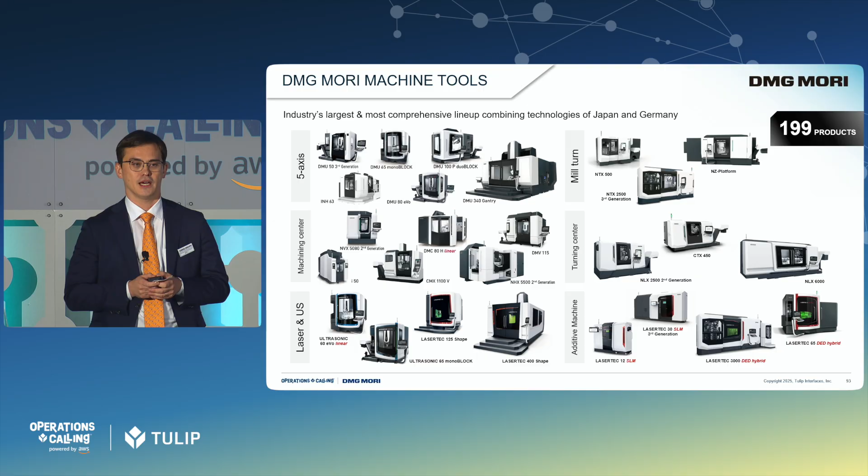These are the machines we produce. I guess everybody has heard of machining centers or lathes, but this technology has developed over the last 50 years, and we now also have metal additive manufacturing, laser cutting machines, ultrasonic cutting machines, a wide variety of machines to process metal and produce precision parts.

These machines of ours are produced in 17 factories in over 7 countries. We also have a production facility in California, Davis, but the main factories are especially in Germany and in Japan. The factory I'm also in charge of for product management is the Iga campus, which is our main factory in Japan. Today I will especially be talking about our Tulip activities in this very large factory.

Another big main point about DMG Mori is that we have a global direct sales network. All our customers worldwide can receive direct support from our sales, service, and engineering teams in 88 countries from 116 locations. So maybe that's a very unique point. Most of our competitors work with dealers or agents, but we try to solve all the problems of our customers ourselves.

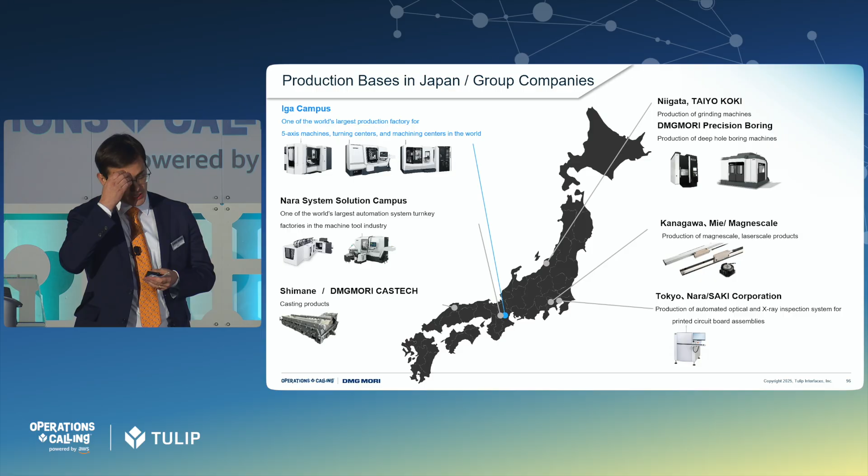Next, I will be speaking especially about our digital transformation activities in the Japanese facilities. I highlighted especially the Iga campus in blue here, where we produce especially horizontal machining centers, turning centers, and mill-turn centers. These are maybe a few of the most representative machines in our group. And in the Iga factory, we do production, also machining parts for these machines.

But I would say the main manufacturing of machine tools is assembly. So you can say that also many of our use cases, which I will introduce, are around and surrounding assembly.

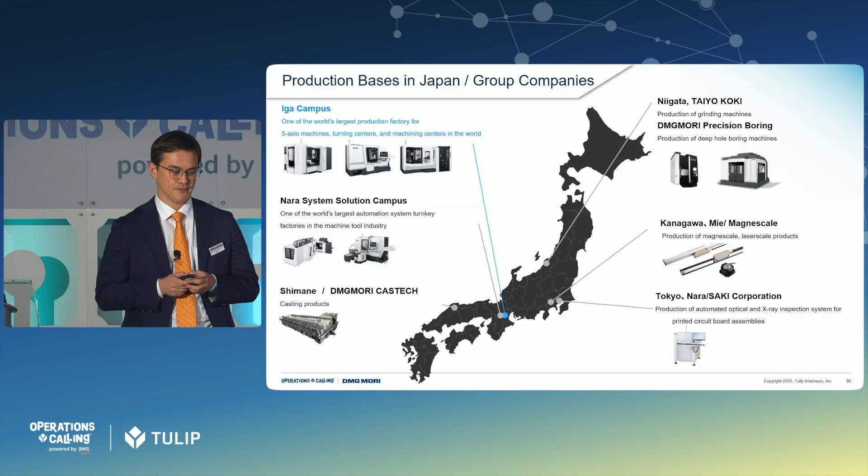Maybe as a last slide introducing DMG Mori - I think Nathan talked about digital transformation, or continuous transformation as he coined it today, in the manufacturing industry. But we at DMG Mori see the digital transformation topic a little bit different from a purely machining or precision manufacturing point of view. We see that this transformation, especially in machining, has to be a little bit more holistic, integrating the mechanical engineering.

So we see the new transformation in this industry as integrating process integration, and then of course robotic automation, and then covering this all, or supporting this all, with the digital transformation. From our point of view, of course, our customers are mainly doing precision machining, so to cover the machining and automation optimization, we need digital tools.

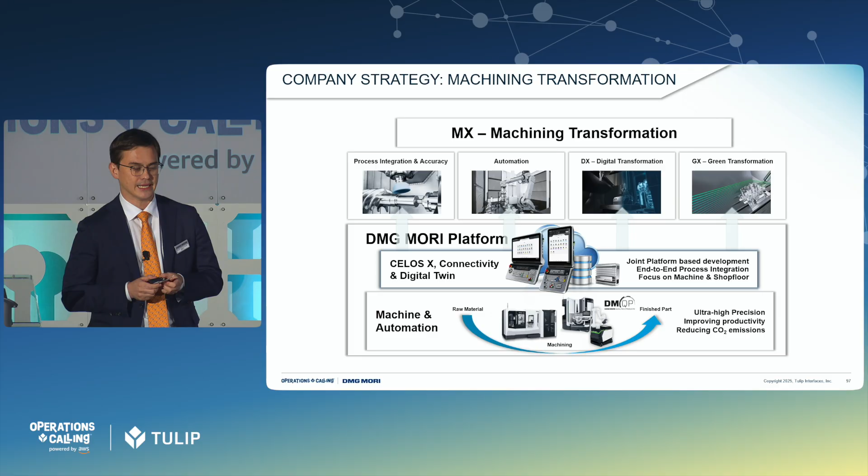And most of the digital solutions we bring to our customers are more or less in support of these optimizations of machining. And Tulip is, of course, one of the tools we use, or we also utilize as a core part of this digital transformation for our machining transformation strategy.

So maybe this is a bit in detail, but I will begin by talking a little bit about our general journey at the IGA factory for digital transformation. What were the core elements of it? Then I have some use cases from different areas in our manufacturing: machining, assembly, quality, information flow, and finally material handling and picking. But I think explaining the core of our digital transformation journey is the most important part of this presentation, where I would like to spend most of the time.

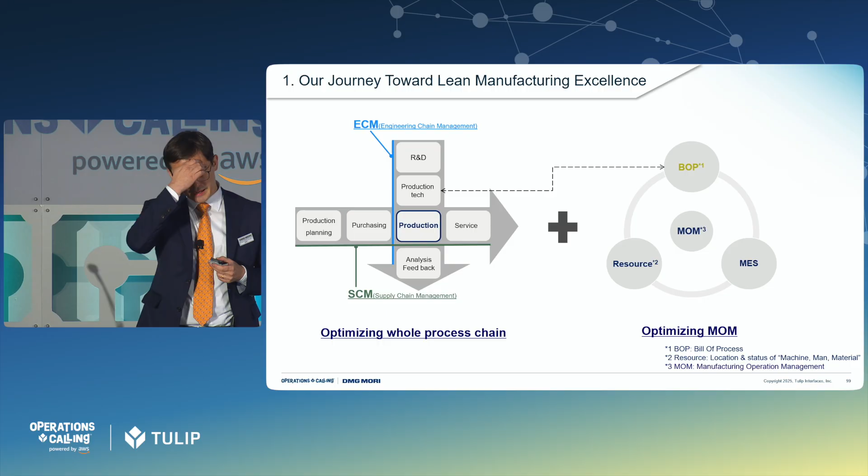So first of all, to give you understanding, as an OEM of machinery, we have two chains of production or manufacturing in our company. One is the engineering chain, here called ECM, engineering chain management, and then we have the supply chain management, SCM.

What this means is that on the one hand, we have the engineers who are developing the machines, coming up with the design, and then considering how these machines should be produced. On the other hand, we have the production engineers who consider what the production process looks like in detail. Because these two different chains have to work in alignment, this is always a huge challenge as an OEM.

And here, Tulip played a very big role in transforming the way we do things at DMG Mori, because we were able to bring in the BOP, the bill of processes. So when the engineering chain management team develops a new product, they create a bill of processes—the processes to produce the product.

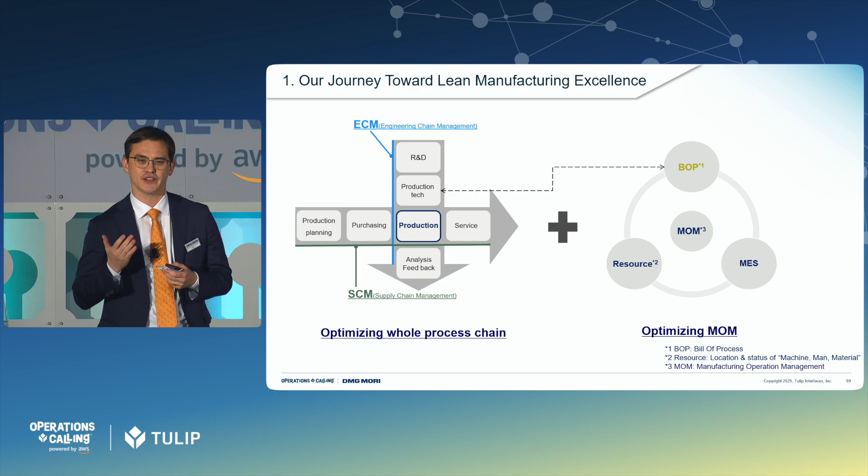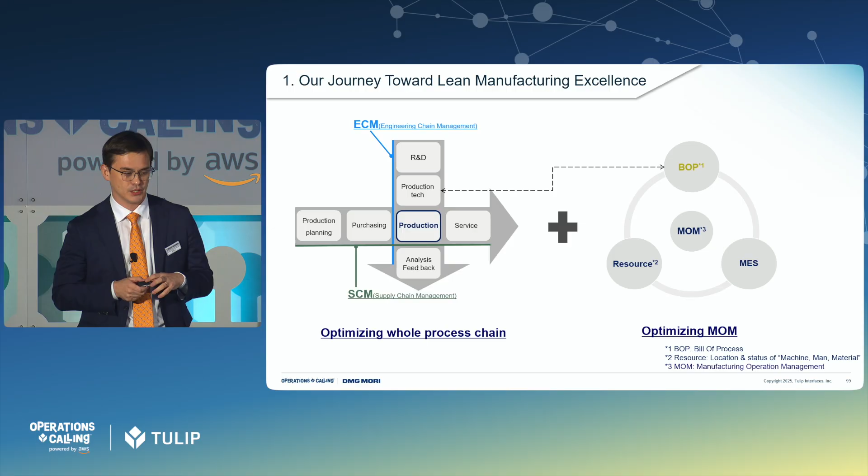Normally, in many manufacturing facilities, the bill of process is just a document that is produced and created in the beginning, but after it's produced once, it's never updated because it's very difficult to update this kind of document. But by bringing the bill of processes into Tulip, we are now able in our manufacturing operation management to fully have a living bill of processes combined with the MES and the resource management, which enables our continuous improvement of the bill of processes, and which made a huge change for us.

So what did it look like when we started the journey with Tulip? Of course, it was not like we only used pen and paper. Already in 2020, we had some digital tools or software tools. But the biggest challenge was that we had siloed systems.

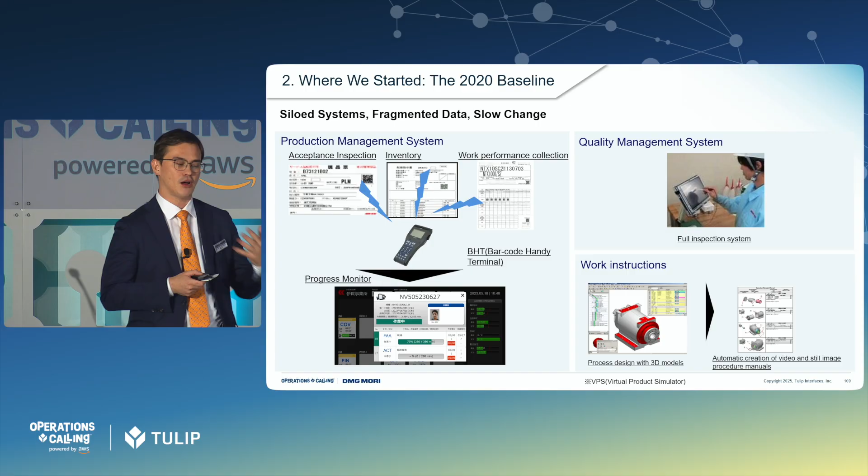We had point solutions surrounding the barcode handy terminal, which was the record keeping of our production engineers. Then we had the quality management system, which was the tool for our quality management. And then we had the work instructions that were created by the machine design engineers. So all these systems were siloed, fragmented, and it was very difficult if our engineering frontline found problems to update anything, because the update might happen in one silo but did not communicate to the other silos.

So now, with the help of Tulip, we created a much more integrated system where every system is talking to each other with Tulip at the core.

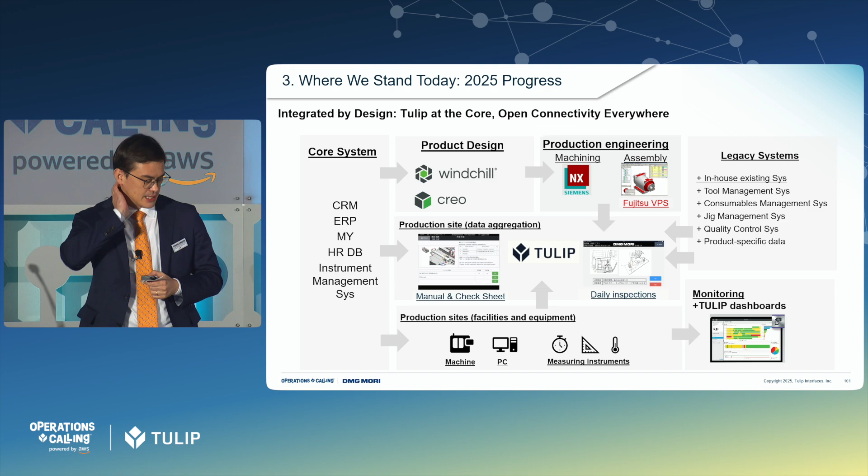Of course, this is still a complex picture, and I guess we still have a very high complexity in our production. But as you can see, on the left side we have the core systems like our ERP systems, our HR management, all kinds of enterprise-level systems. And on the top is where especially our design team works.

So, of course, you have CAD systems for product design. And then you have the production engineering, where our machines are programmed to produce the parts that are needed in the machine tools. But then when it goes to the shop floor, until now, there was almost nothing, because on the shop floor, the people had very rough instructions, and the data about what was happening at the shop floor could not be monitored.

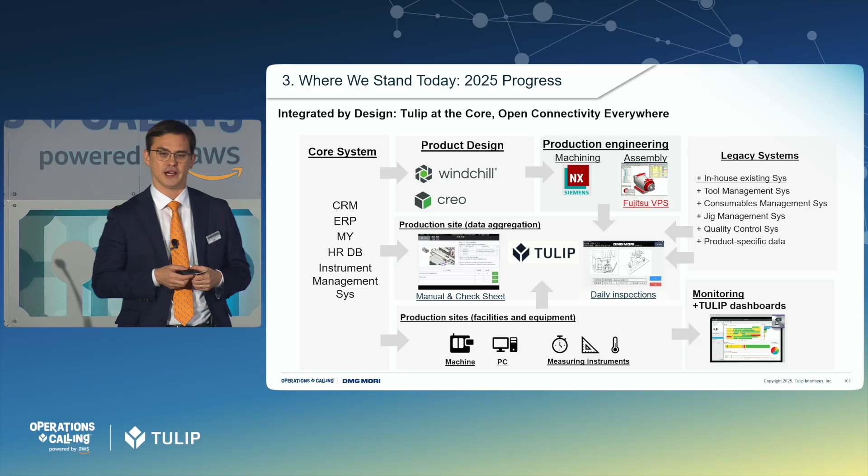But with Tulip at the core now, we are able to continuously create applications that transport the information or the plans that our engineering teams came up with to the operation on the shop floor.

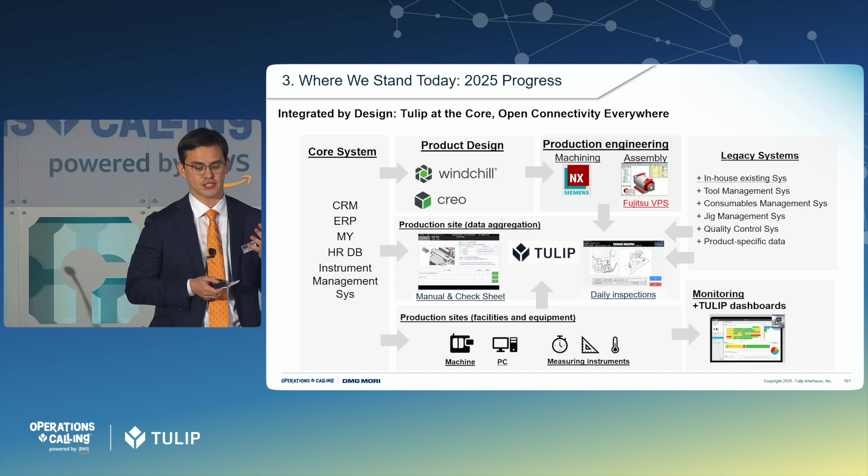We are focused very much on integrating all the tools that our shop floor employees are using to directly communicate into Tulip, to record everything that is necessary to continuously improve our production. On the right side are the points we still have to work on to improve. There are certain legacy systems, like tool management and consumable management on the shop floor. This is more or less a checklist, because we already know with Tulip and maybe some other tools, we are able to move them out of the legacy step by step and turn them into much more platform-oriented systems.

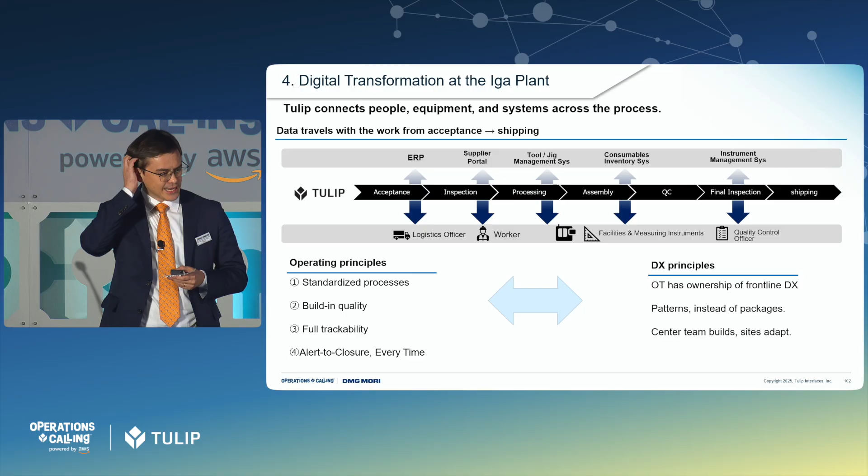So to give you an understanding, this picture on top shows that the whole process chain is now on top. Of course we have the core systems, but now everything is traced on the shop floor, on the front lines with Tulip apps, from the logistics where products from our suppliers come in, to the inspection, then to the assembly, quality management. Everything is traced with Tulip. And for us as a company, it's very important.

So we have certain operating principles. I think they are very typical Japanese manufacturing thinking, or lean manufacturing. All the processes we do should be standardized. We try to not have any unique processes, we try to standardize all the processes. Then all the processes should have built-in quality. That means, of course, there are some post-process quality checks included, but as much as possible we want to integrate the quality into the assembly or manufacturing process.

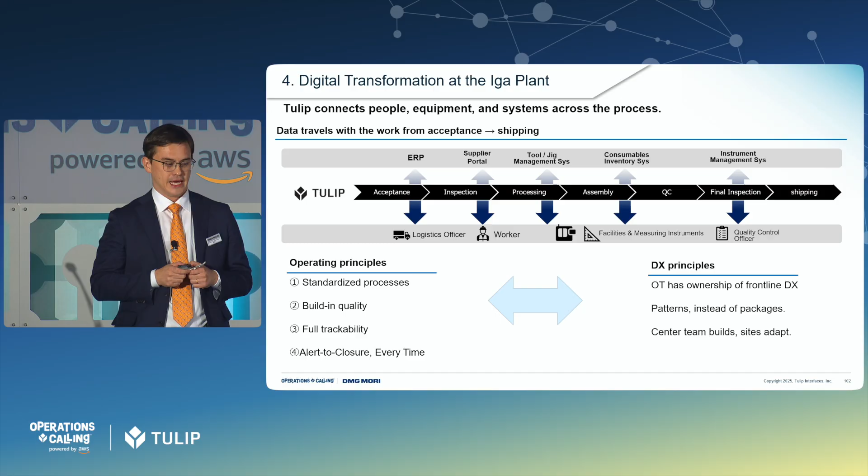Then, of course, we need full traceability or trackability. And I think the last point is very typical, like Toyota-style manufacturing: every time there's an alert or abnormality in the production process, we make sure that every abnormality is closed, and this happens all the time. There are no failures that stay open in the process chain.

On the right side are our new principles that we learned with the rollout of Tulip. In the past, most of the IT systems came from IT vendors, from system integrators, but we have completely democratized the IT in our frontline. That means OT has full ownership of frontline digital transformation.

Then we tried to create patterns. What I mean here with patterns instead of packages is, we are a relatively big company, so we want to roll out the best use cases or best practices to all our factories. But as we know, I think Tulip teaches this very well, no factory is the same. Every factory or every production is unique. This is also the case in our company. Production, even machine tool factories in Germany and Japan, are quite different. So we are not able to roll out the absolute same applications, but they are patternized, and we try to use best practices that are then customized at the front line.

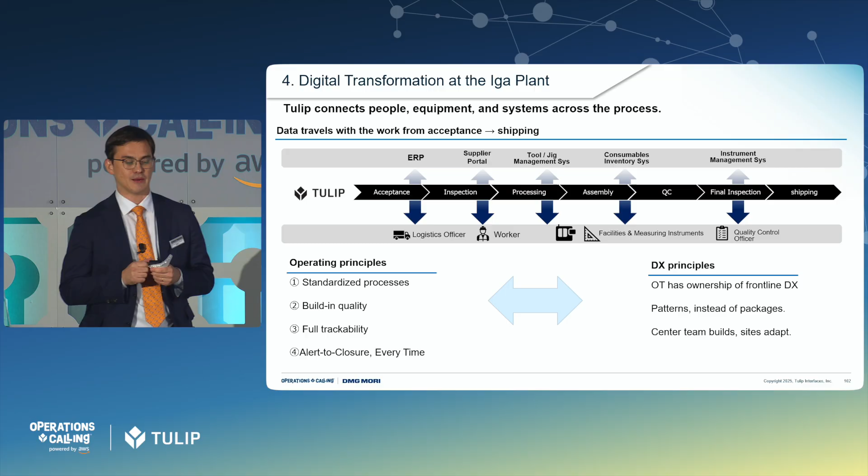Which is summarized in the sentence: the center team builds the apps, and the sites then adapt how they are used.

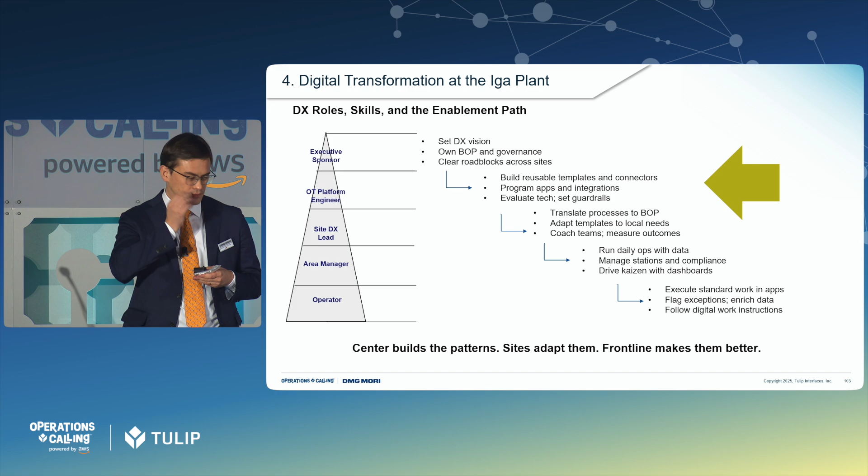Another huge learning for us was that a digital transformation process in a large organization needs organizational structure. Same as we have organizational structures for engineering, production planning, or whatever, the digital transformation also needs an organizational structure. Especially with composable MES systems like Tulip, we need a strategy. We saw in the beginning, and I think I made the same experience with customers, that often people believe that with composable MES you can start purely from bottom up. But actually this is not the very best way to move forward with this.

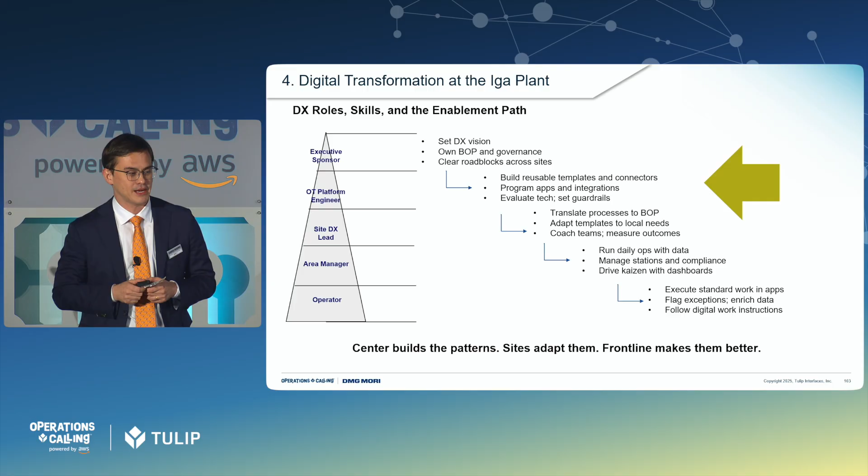I think it's a hybrid process. On the one hand you have bottom up, on the frontline apps are built or optimized, but you need a strategy from the top. So every digital transformation project needs an executive sponsor.

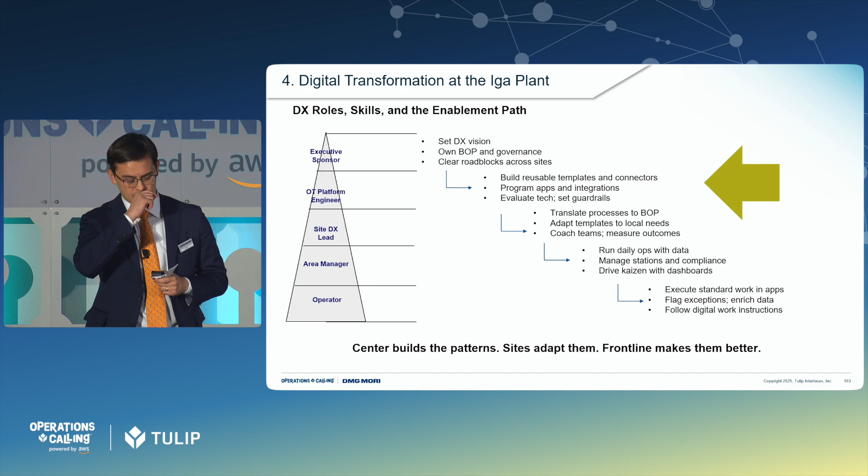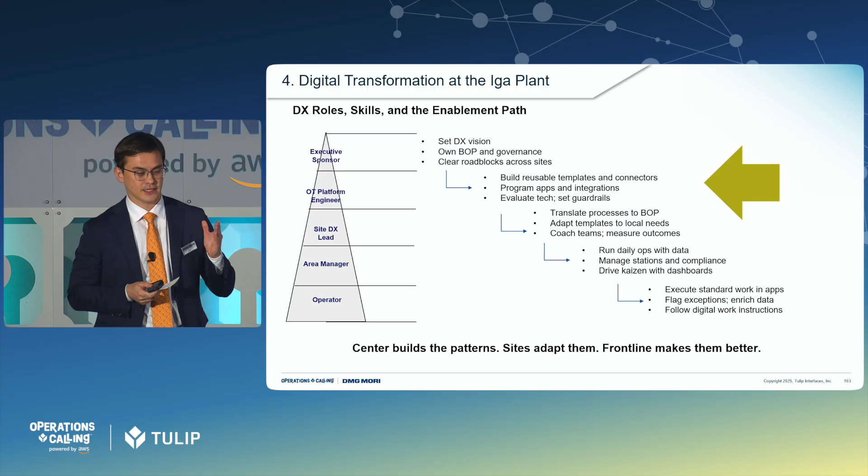That's why I made this yellow arrow here. I think the most important department or team to create when you roll out composable MES or any no-code application in a manufacturing environment or across an enterprise is a certain steering team. That's what we built in Iga, and I think it's also the secret behind our big success with Tulip, because this team has a very deep understanding of the applications or use cases, and they are able to continuously roll out or solve problems and roll out the best practices, not only inside our factory but also to our sister factories or to our suppliers.

So we started in 2021 with a dojo, because of course, if you want to democratize IT, you need to teach the people in the front line. So we created a dojo where our Center of Excellence taught the different teams about Tulip, how to build apps. Then the teams immediately after this phase started to build apps, and we had onboarding at scale across all different types of departments.

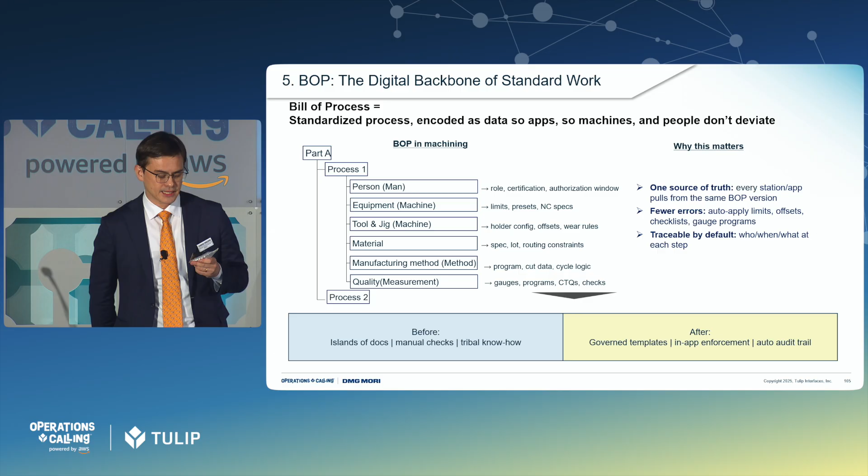So just as a final slide about our overall experience: one point that we thought is very important, especially in a larger OEM environment, is to have very good BOP management—the management of the bill of processes.

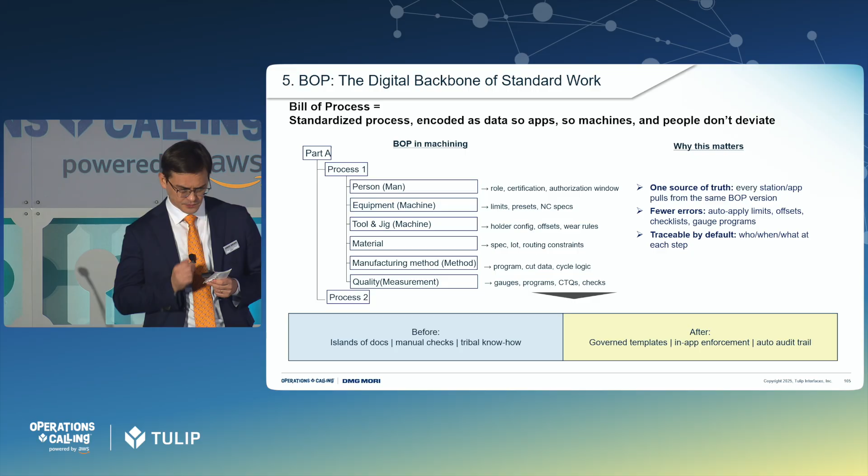The bill of processes in the past, before we used Tulip, was always a document that came out of product design, which described how a product should be produced in a very rough way. Then the production management or the shop floor had to read between the lines and adjust it, but normally this information was never fed back to the teams that designed the products.

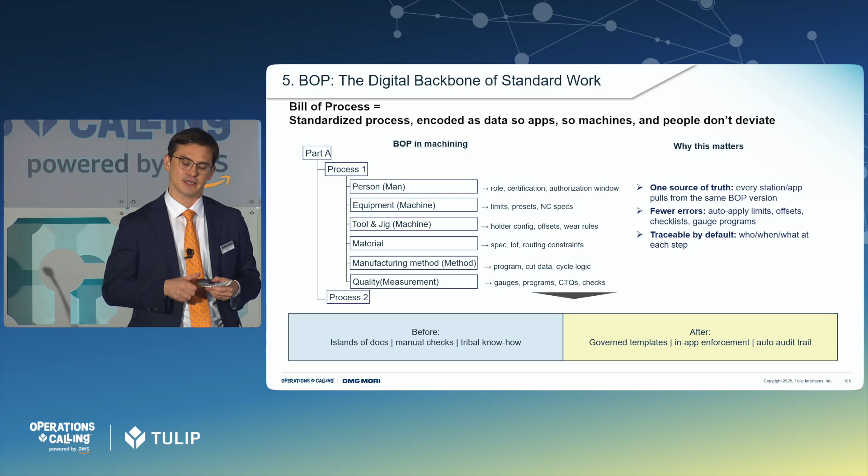With the rollout of Tulip, the BOP has become really one source of truth, because the BOP is now shared—it's like a work in progress. So when a new product enters production, we are now able to update the BOP, and we have much more standardized processes because there's no interpretation between the lines.

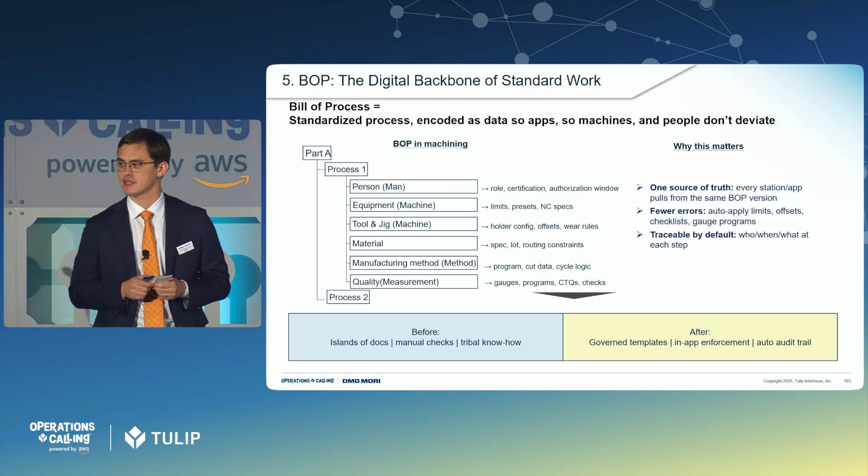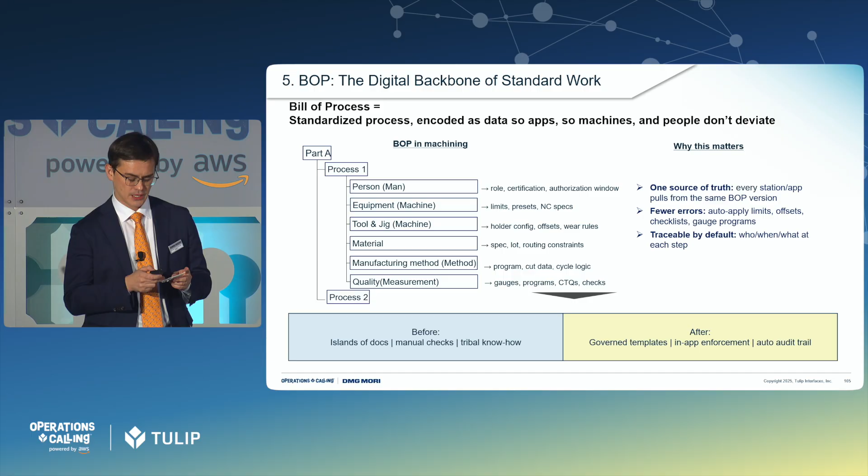What I can recommend, which is what I'm already doing for a lot of our customers, is that if you have a complicated product lineup, if you're designing products that are complex, having a BOP will help you roll out this kind of environment. So I will introduce some of the use cases.

I have to warn you, some of them are quite complex, so maybe not that easy to understand. I will try to make it easy, but I didn't want to take out too much complexity from these use cases, because in the end we are speaking about very complex issues. So I hope you can follow.

The first one is actually the most complex thing we did in the last 1.5 years, which is creating a Tulip-centered tool management in our company. In the past, tool management—cutting tools and machine tools—was a very important part of the machining process. Cutting tools are very difficult to manage because on the one hand, when you plan a production, you have to consider which cutting tools to use, and once they are under usage, you have to track how much wear has happened already.

You have to track the cost of the cutting tools. You have to track the stock of the cutting tools. You have to get everything just in time. And, of course, they are also quite small in a big factory environment, so knowing where they are and getting them to the place where they're needed at the time is very difficult.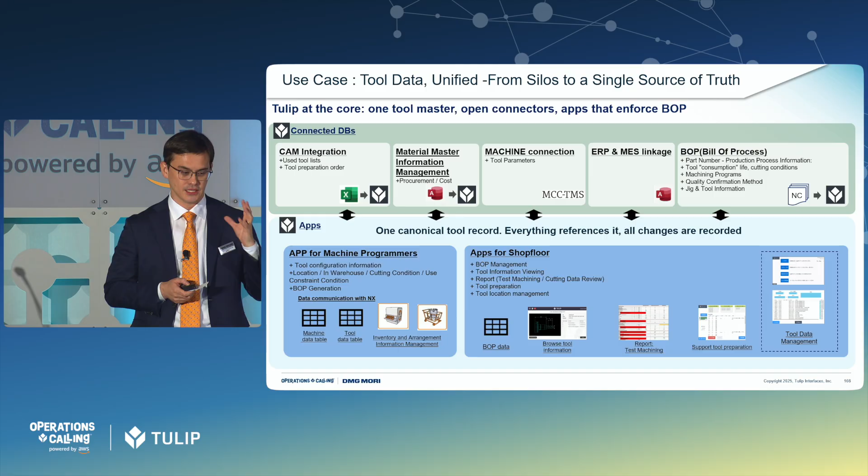Then we have the material master information management, which is necessary for our procurement. Then we have to communicate this information to the machines, because we don't want to manually input this into the machines. So we have to connect this to our machine tool management system.

Then we have, of course, to keep everything aligned with the ERP and MES. And then finally, we also have to align this with the bill of processes, because every time an engineer designs a part, he has to create a bill of process that also includes all the cutting tools, and how the cutting tools will wear off after producing 1 part, 2 parts, 3 parts.

This is very complex. And by integrating this all into Tulip, we were on the one hand able to create an application for the people who program the machines, so they know all the information about the cutting tools. On the other hand, for the people on the shop floor, getting the information they need to do the operation.

And how this actually looks, this is like the 3 steps, more or less. So on the very left, you see the people we are now using in-house. We are using Siemens NX as a CAD/CAM.

So the people who are doing the CAD/CAM can find all the tool data through Tulip immediately. They don't have to hunt down the tools, the tool information. So the common operations for tool management were reduced dramatically, on average, from 10 minutes to 30 seconds for a certain part.

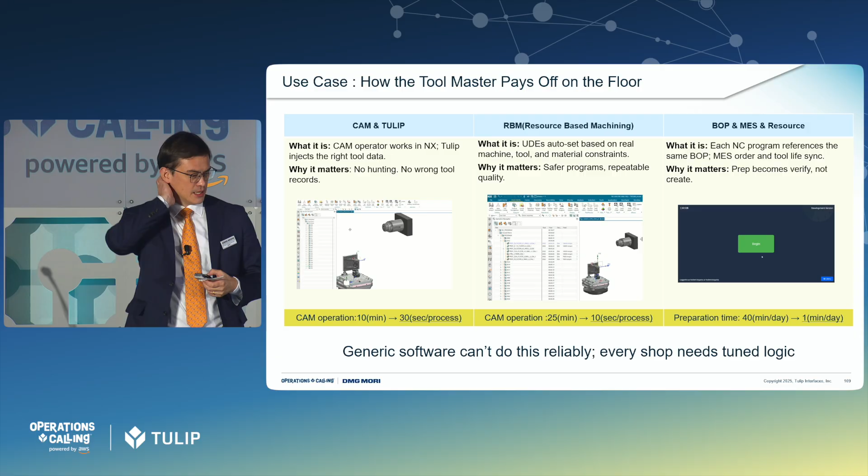And then the resource on the other hand - UDE is a term from CAD/CAM. So the information that is necessary to update the CAD/CAM information when a tool is already used, or is a brand new tool, is a little bit different. So this updating also now happens through Tulip.

So if a tool is already used on one machine and then brought to a different machine, this information can be directly linked through Tulip to the second, different machine. And then, of course, all this information has to be updated constantly in the bill of processes, and this can all be done through Tulip.

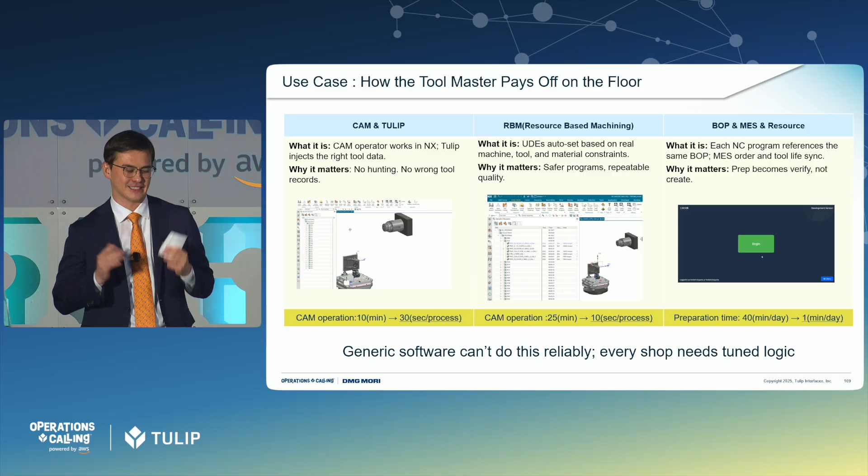So why did we do this with Tulip? I guess you can imagine there are a lot of different software solutions for tool management. But as a company of our size, we actually compared a lot of specific tool management softwares, but we realized that none of those actually just fit our needs.

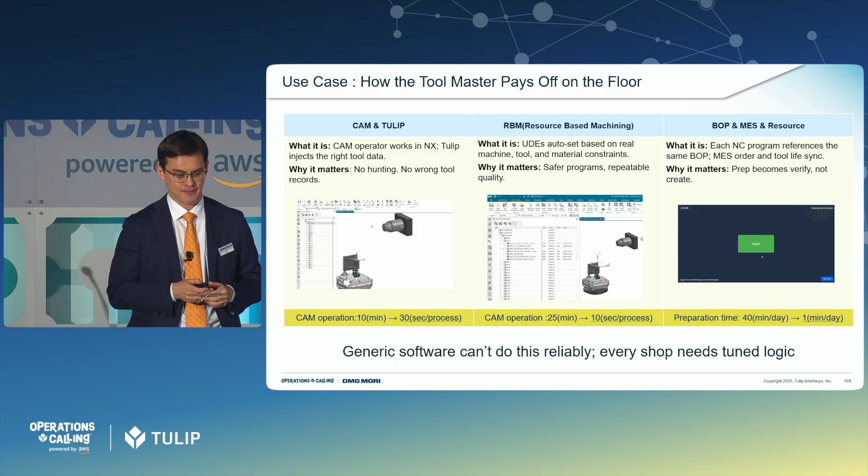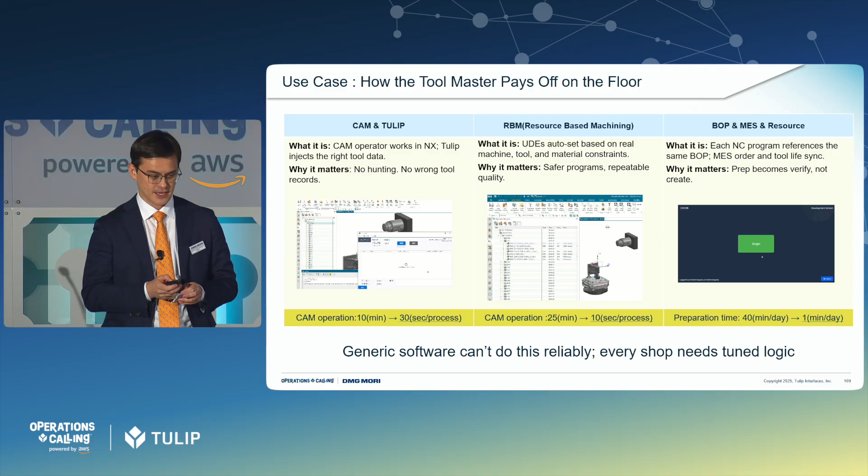So our engineering team decided to build the tool management by ourselves, which was possible, of course, with the no-code platform. So, of course, the lesson learned here is that sometimes it's better to use a specific tool, but if you don't find the software that exactly fits your needs, then it's always maybe a good idea to build it yourself. And then, of course, no-code is the best solution, I would say.

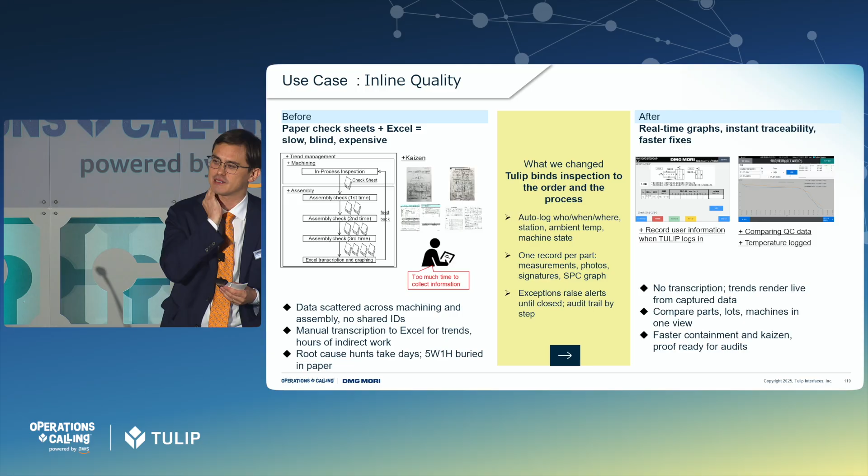Another topic here is inline quality. So in the past, our quality management was a lot of pen and paper. I guess this is not a very unique example - I think this can be seen at a lot of manufacturing facilities. A lot of quality information is collected with pen and paper, and we transferred all of this into Tulip.

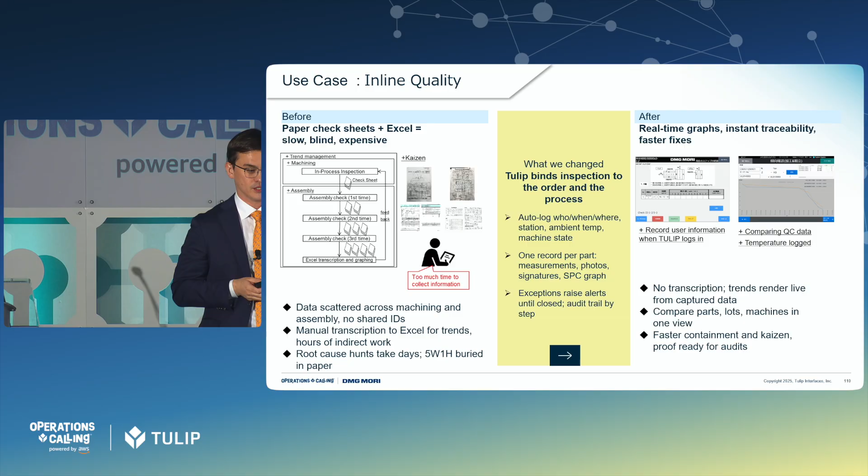This enables us to see quality deviations in real time, because all this goes into graphs that are automatically created. So we were able to completely get rid of paper in our quality department. We even made it a rule that there's no paper anymore, which we were then able to achieve.

The next use case is assembly, which I'll spend a bit more time on, because as I said in the beginning, assembly is the most important production process in machine tools.

One important point was the ability to bring together engineering chain management and supply chain management. We used our system for BOP, the bill of process management, so that Tulip can directly read out of that system. When a designer designs the bill of processes, it's not only in his design software, but directly broken down into a Tulip step-by-step manual for operations. This was a big game changer, because from that point on, engineering chain management and supply chain management were completely aligned. This was a huge change.

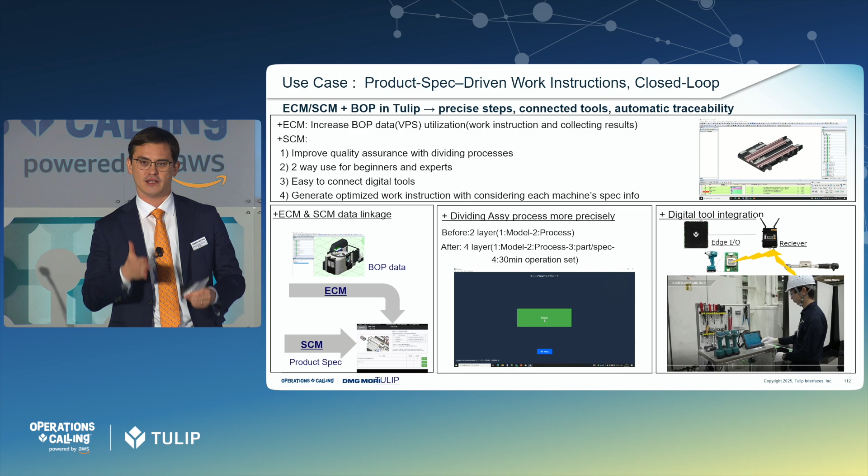We use Fujitsu's VPS software, but I guess this could be done with any type of assembly simulation software. We recommend this to our customers all the time, to bring these digitally in alignment, because as we see in many companies, if there's a divide between these two systems, you will never get full alignment between these two departments.

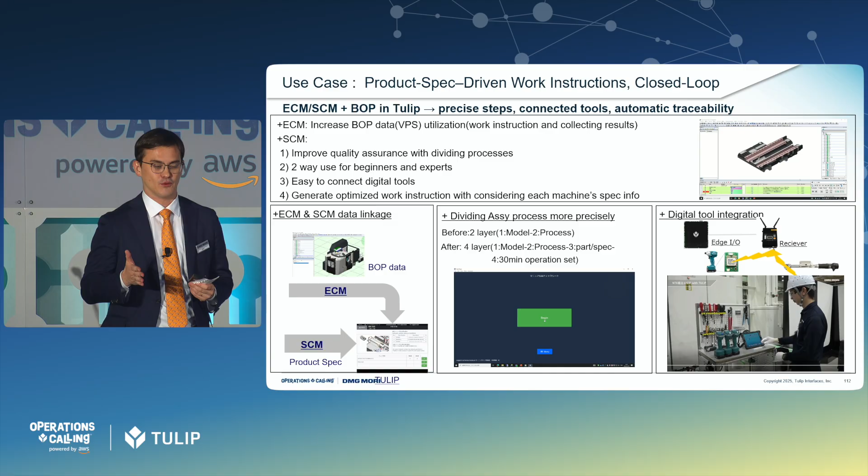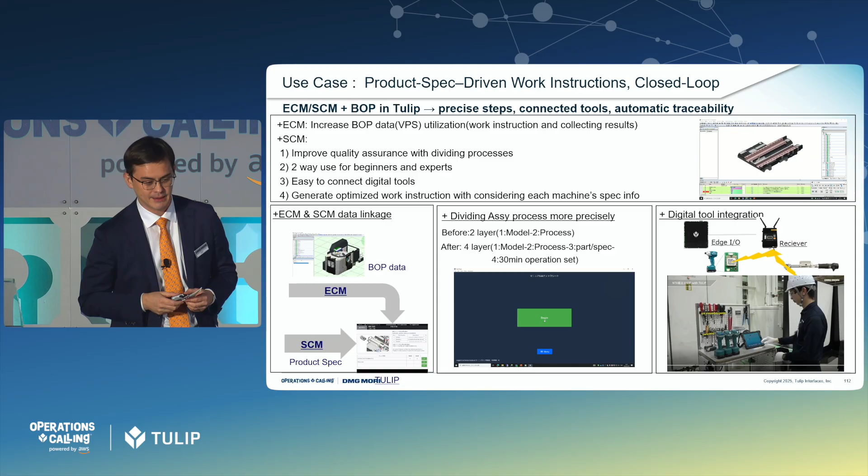Since the bill of processes was then in Tulip, a work instruction software that can be updated all the time, we were able to go much more in depth, creating really small step instructions for our assembly employees. As I understood, we measured reducing products that had quality problems after installation by 75%. This was a huge impact for us, maybe the biggest impact for IGA from rolling out Tulip.

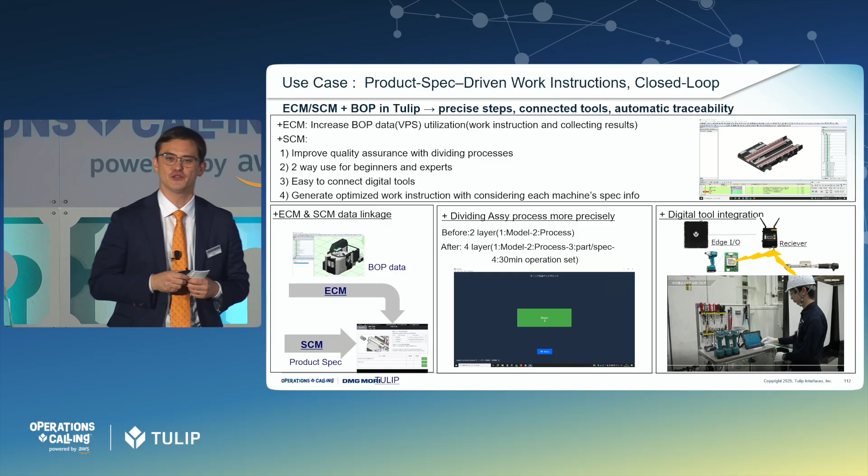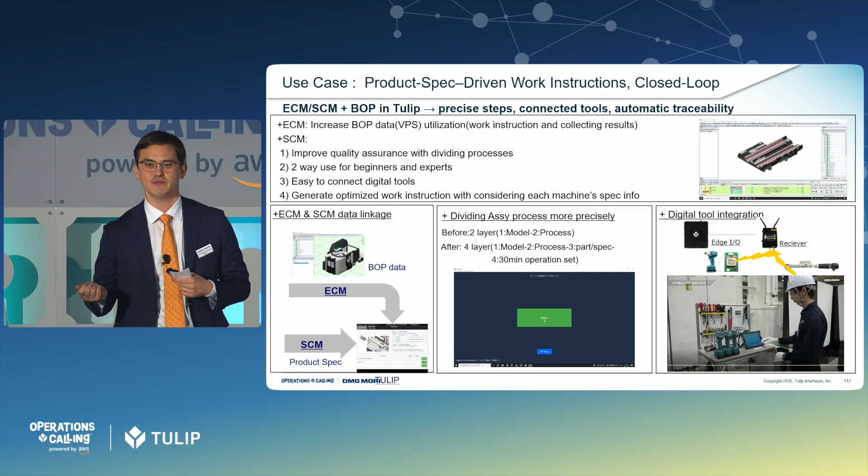A lot of customers, when they come to our factory, the first thing they see is that all our hand tools are IoT-enabled. As I said before, we removed pen and paper, but now we also removed manual input. By IoT-enabling all the tools we use for assembly, for example, the torque measured by the torque wrench is directly written into the system, so there's no mistake anymore by manual input.

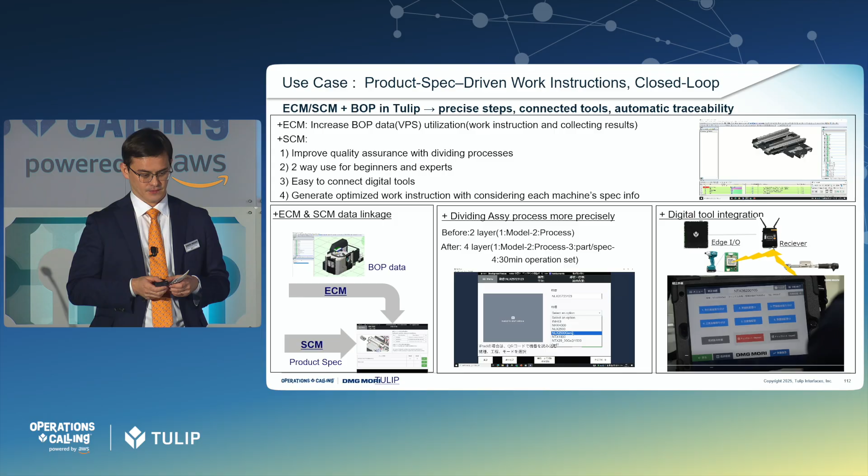As you can see here, they just activate a certain process and then use the IoT-enabled tooling, so there's actually no input needed, just selecting the process.

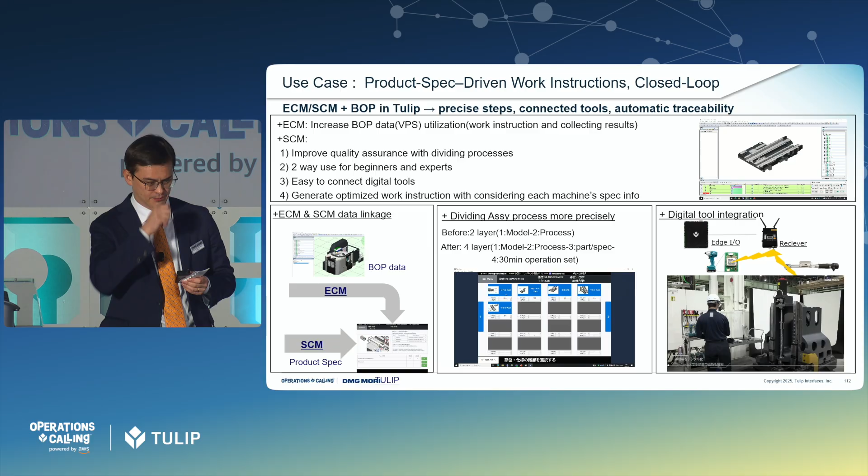To go a bit more into detail on how more specific, detailed work instructions benefited our department or were enabled in the first place: before, we had the model and then the BOP, which was only a very high-level instruction. So the people on the shop floor had to come up with the idea of how to actually assemble the products themselves.

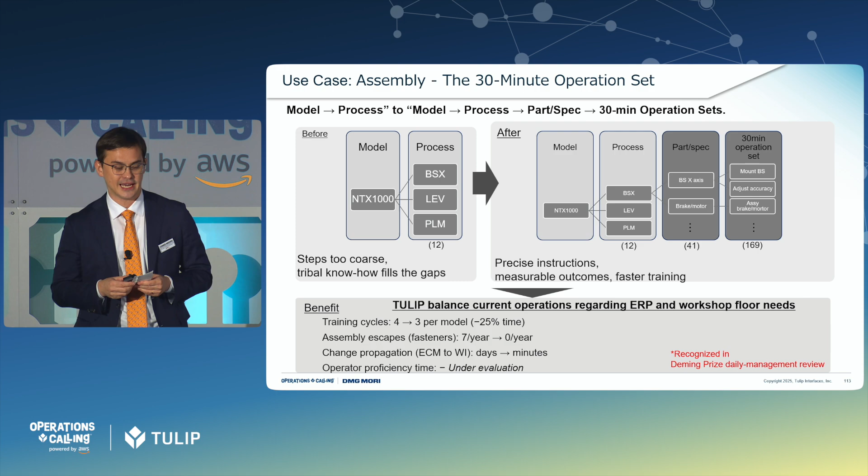By combining this with Tulip, as you can see on the after side of this slide, we are now able to see the light gray areas, which are in the assembly simulation software, and the darker gray area, which is in Tulip.

By rolling this out on Tulip, our production management was able to create a new rule in the company that all work instructions have to be a maximum of 30 minutes, so there are 30-minute operation sets. Having these 30-minute operation sets makes continuous improvement much easier, because there's a certain time everybody's trying to protect or stay aligned with, and you can much more easily improve these 30-minute sets continuously.

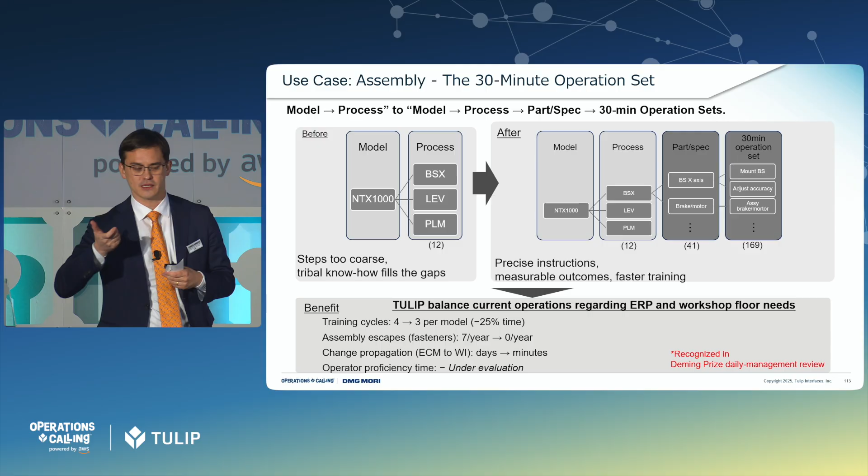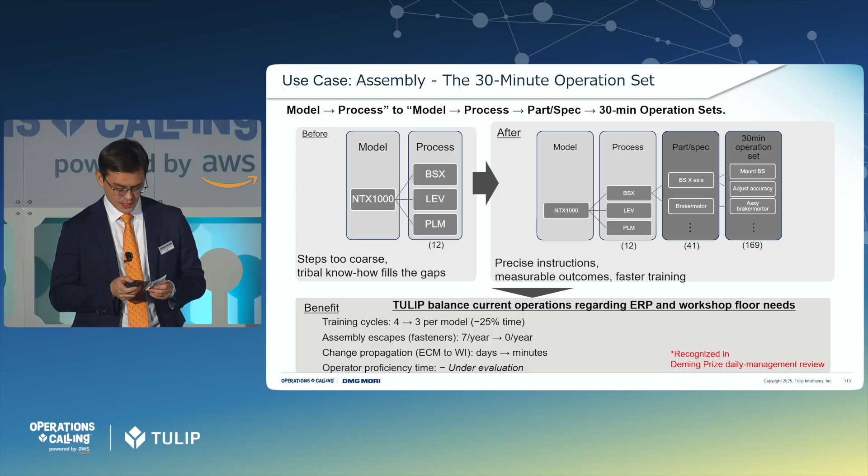As you can see here, this has brought a lot of different benefits to our factory and especially to our products, which is really, really highly beneficial.

Then there's one more use case I want to highlight, using a very new technology, and I think a very important partner for Tulip, which we were also introduced to by Tulip.

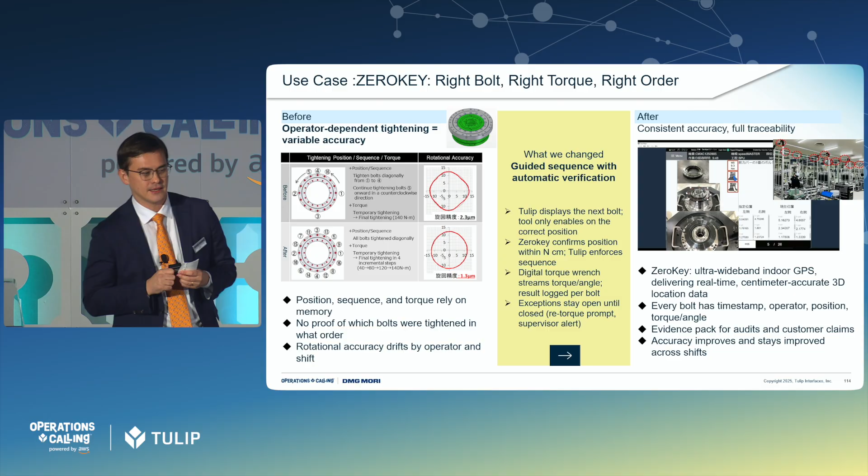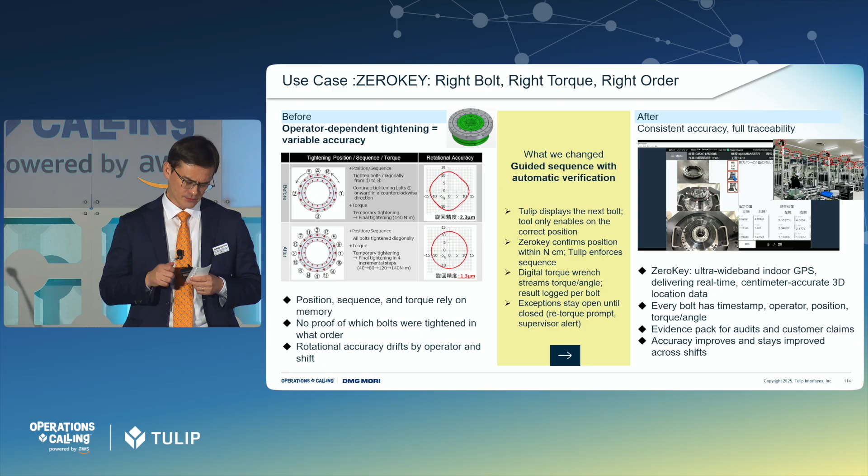This is ZeroKey. As you can see, on a machine tool, this is a high precision machine. There are a lot of bolts and screws that have to have a very specific torque, how they have to be fixed, and the torque used on these bolts has a high impact on the accuracy of our machines.

In the past, often it was the case that the torque and how the bolts were screwed in were very dependent on who was doing it. So it was very human dependent. And of course, if you would use robots, you could also improve this. But the point here is we still work with the same assembly employees.

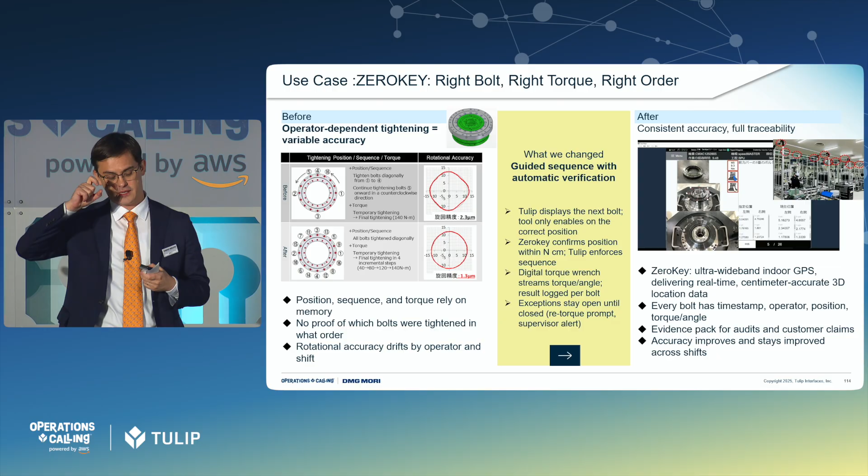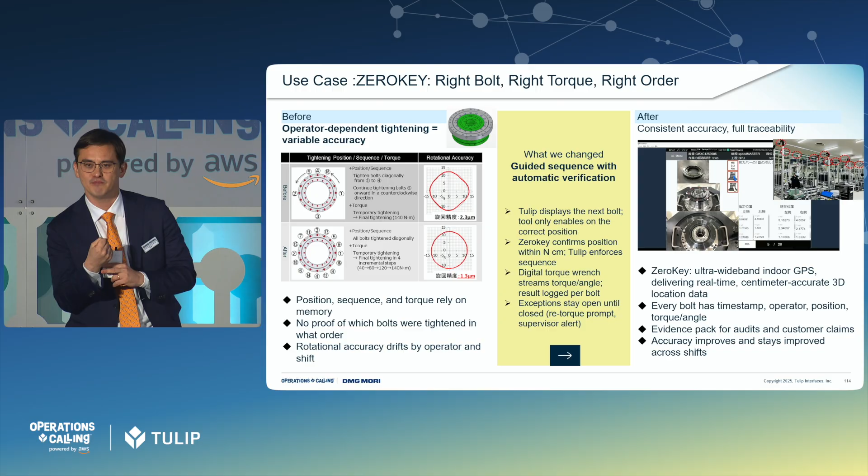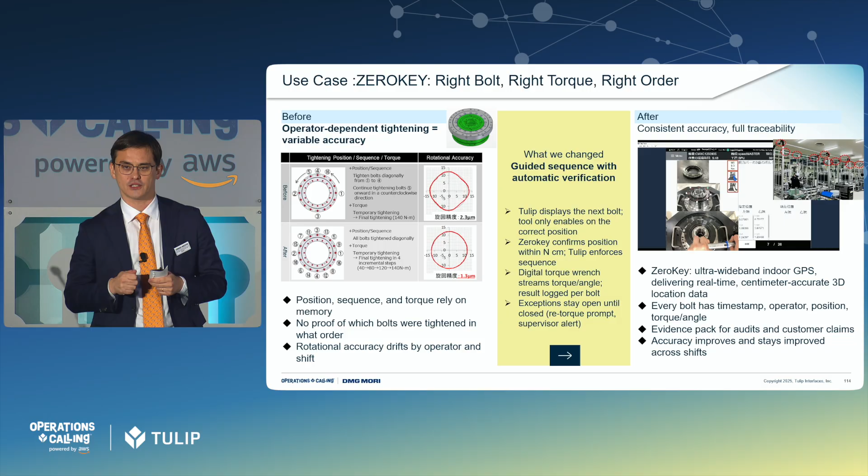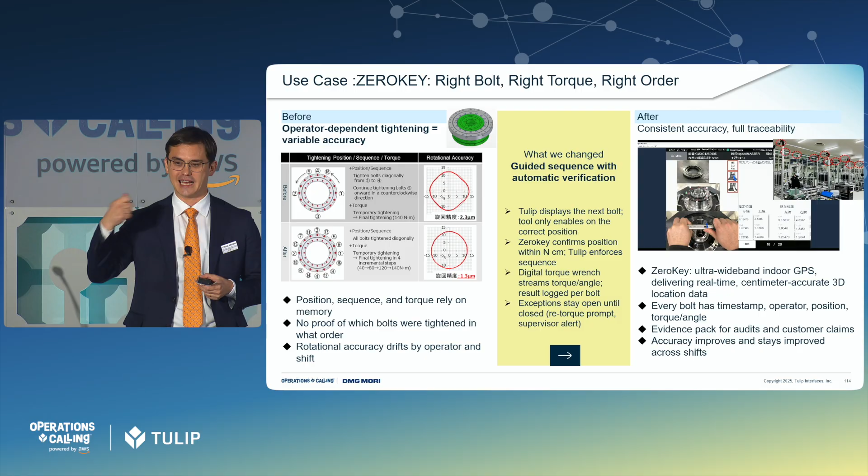But now we are using ultra-wideband indoor GPS that can track, in centimeter accuracy, the 3D location of a GPS tracker. So what we do is we put GPS handbands on our assembly workers, and when they screw, as you can see here, they have an IoT-enabled torque wrench, and when they close the torque, of course the torque is recorded. But not only that, the location that is currently closed is actually recognized by the ZeroKey function, so that the operator has to do it in the right order. He does not have to tell the system which screw he's currently working on, but the system automatically knows where he's working.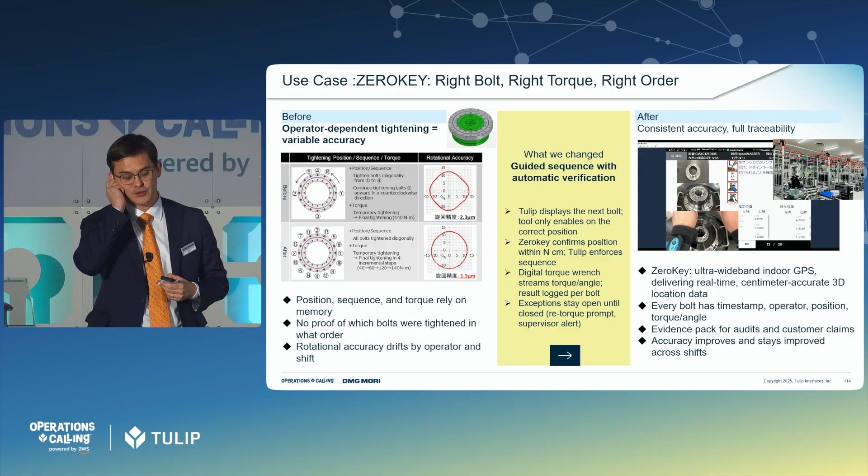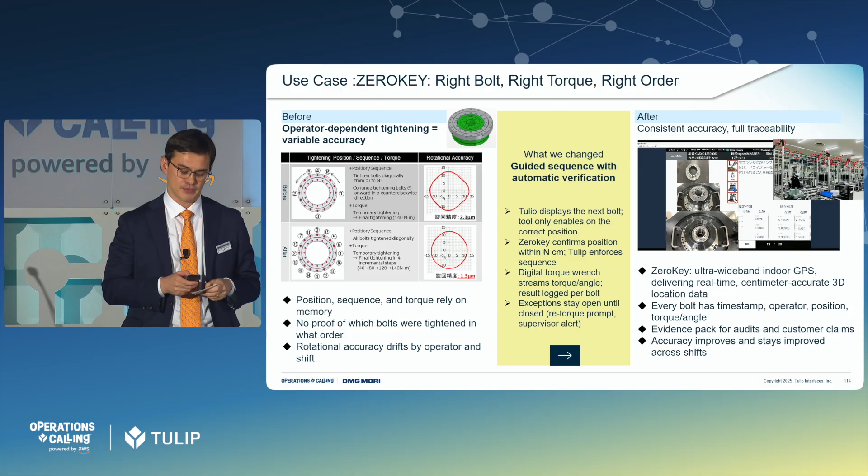To do this, we had to install these GPS readers in the factory, on a factory roof or on the ceiling. But by doing this, we can also trace immediately exactly where the tools are used and on which bolts. So this is also a huge game changer for improving quality.

And the next topic or use case will be inspection and quality. I think this explanation will be a little bit more generic. Of course, in the past, quality inspections were mainly done by pen and paper. And here we used our experience with IoT. DMG Mori has been doing IoT, I think, as a front runner in our industry.

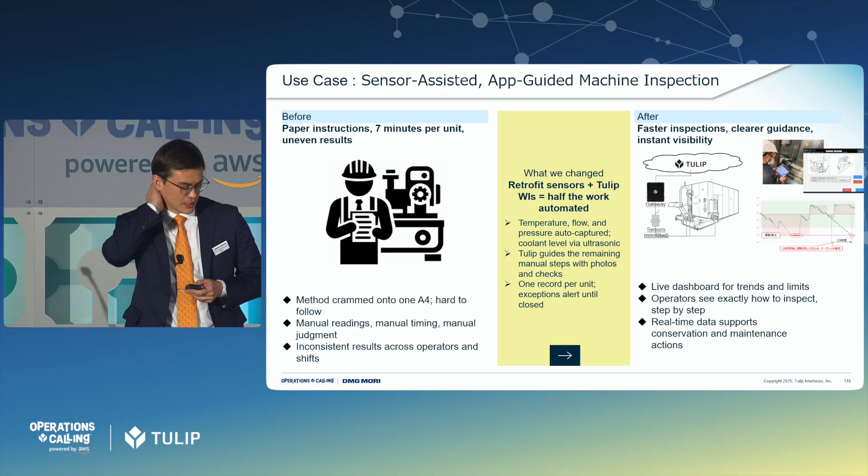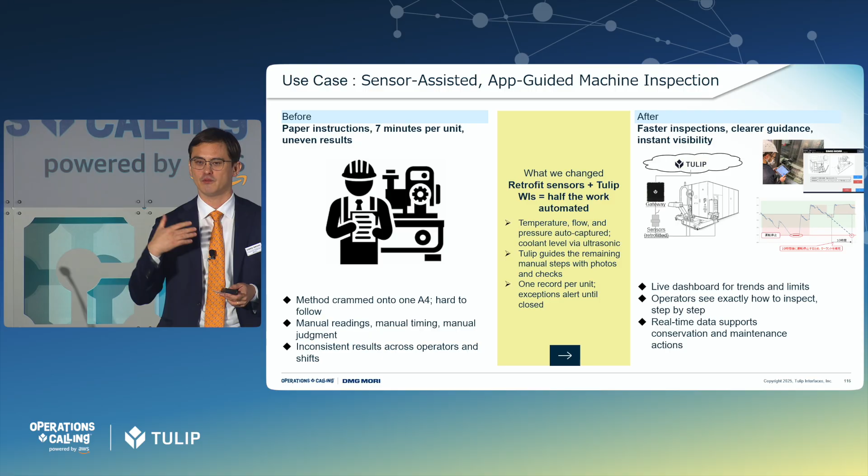So what we did is with Tulip, we are able to read out a lot of different data types from our machines. In the past, we measured these kinds of different information by hand and then recorded them on pen and paper. Because of the ability to read out the information into one platform like Tulip, we understood it makes much more sense to add additional sensors to the production machines we have, because now the data can be directly read into Tulip tables.

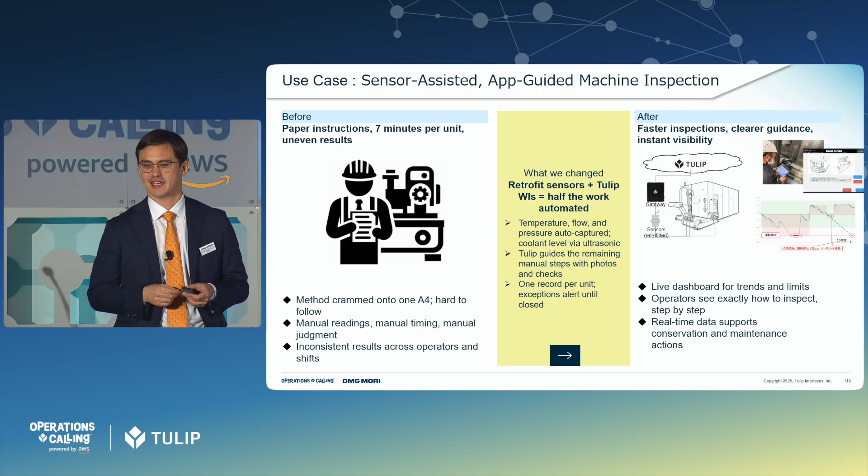And especially, as I said in the beginning with the other use case, this enables a trend line. In the past, the trend line needed certain employees to do certain analysis, and it was only visible after a certain amount of work hours by our employees. But now the trend line is free, and we can always see if there's a change in the trend of quality.

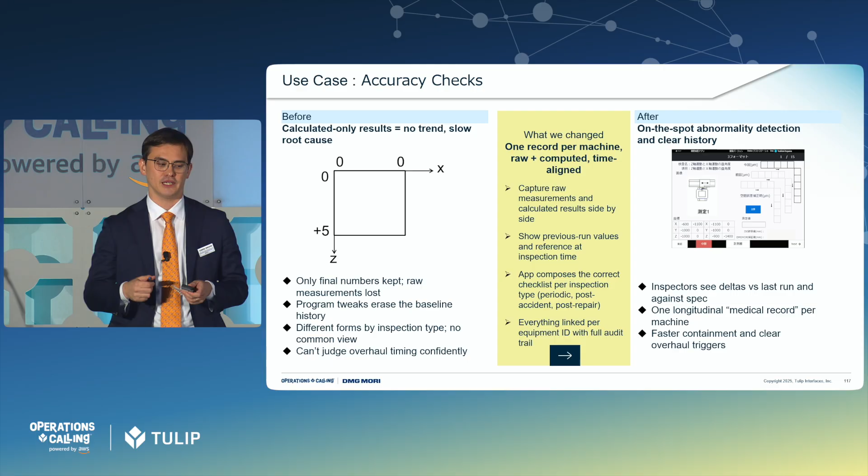Another point is our accuracy checks. In the past, it's a very similar topic. Of course, machine tools need very high accuracy, less than 10 micron accuracy. And to reach this accuracy, the axis of the machines have to be measured during assembly, before shipment, and in production—continuously, again and again.

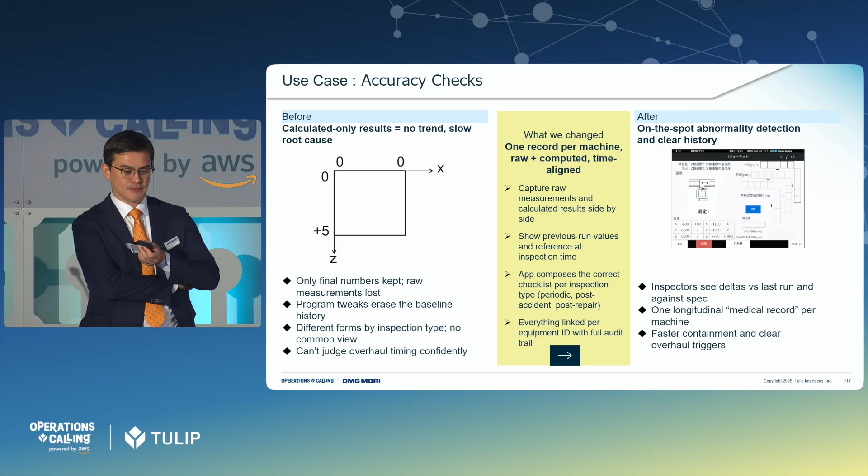And this was also done by hand, more or less—the recording was done by hand. But now we are able to use linear guides to measure these numbers, and this can be completely read out of the machines. We are able to create a medical record of our machines, the accuracy of our machines, which enables really higher accuracy machining than in the past.

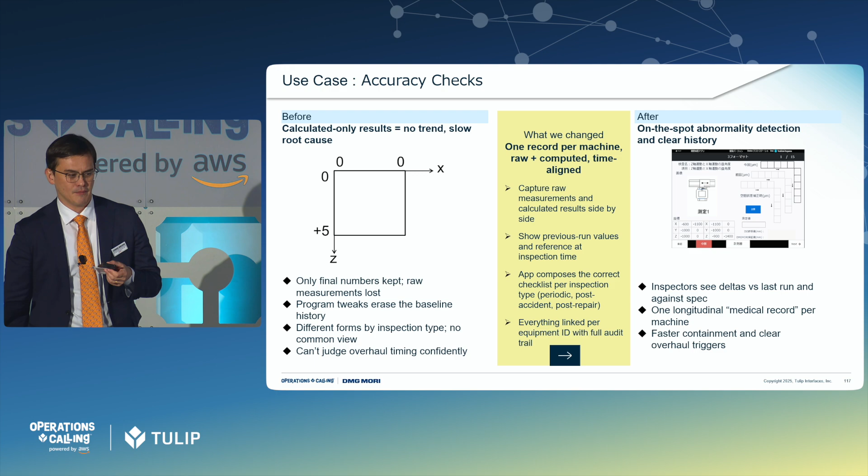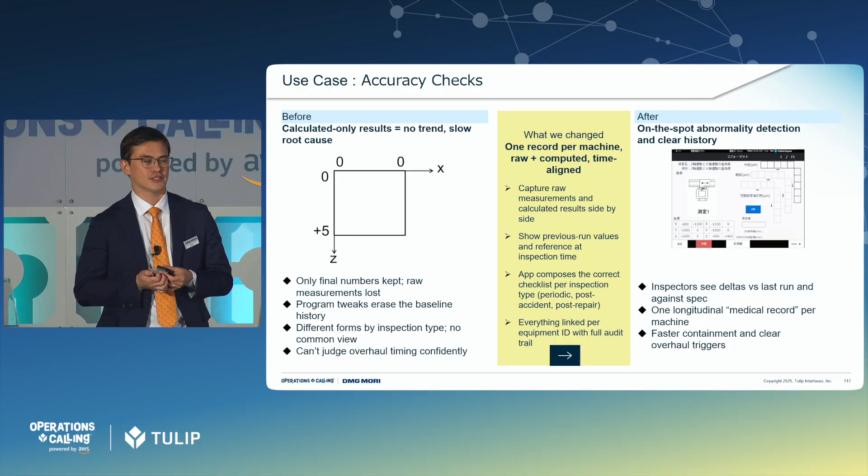I think if you're not in machining, this does not tell you so much, but in the time I've been working in machining—I'm now active in machine tools for about 13 years—the level of accuracy has been changing rapidly, and I think this kind of advancement really plays into it.

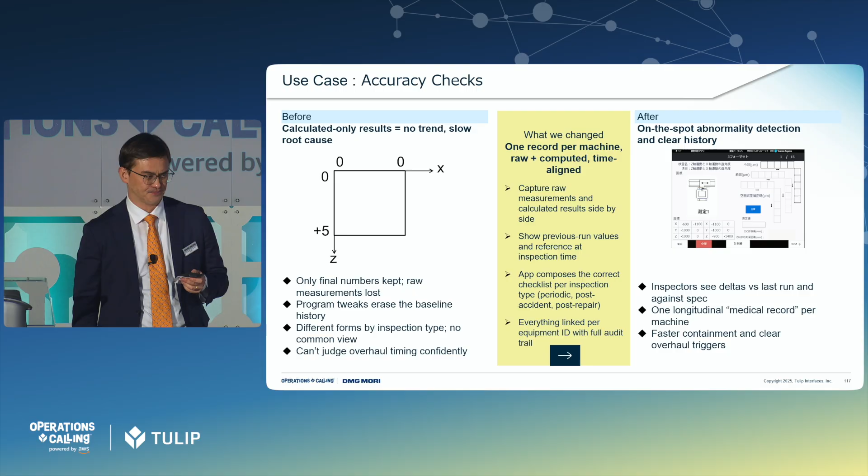Then the next topic is information flow. This is not very machine tool specific, it happens everywhere. Of course, we had shift reports or failure reports from the shifts. But what we saw is that especially these error reports or problem reports, they ended up somewhere. Sometimes people worked on them, but nobody really knew what the status was.

But having this all now in one platform, we are able not only to record all the information that is necessary, but also the process in solving the problems. And also, because all our employees now in production have a tablet, a single employee has a tablet, they can also take pictures or videos and attach them to these problem reports.

Another information sharing area is the stock or consumables management. Of course this is not the consumables management of the whole factory, but on the shop floor, on the front line. What we often see there is white paper lists where somebody writes in what they took. But of course, this is not centrally monitorable.

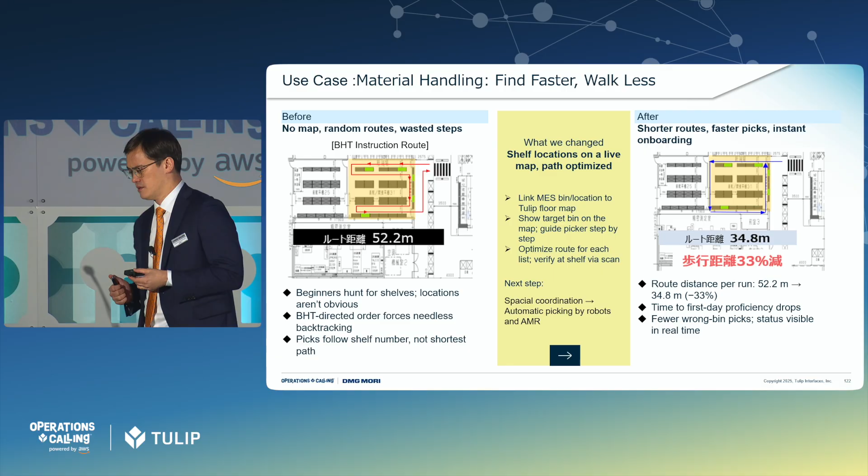When they were picking parts or certain things for the assembly, the system just told them the numbers, and they walked around the shelves to pick up the things. But with Tulip, we are now able to attach maps of our production facilities into all of the apps, so that people picking up parts or assembly material are able to optimize their picking routes, thereby reducing the picking time. I mean, you can say that does not make a huge difference.

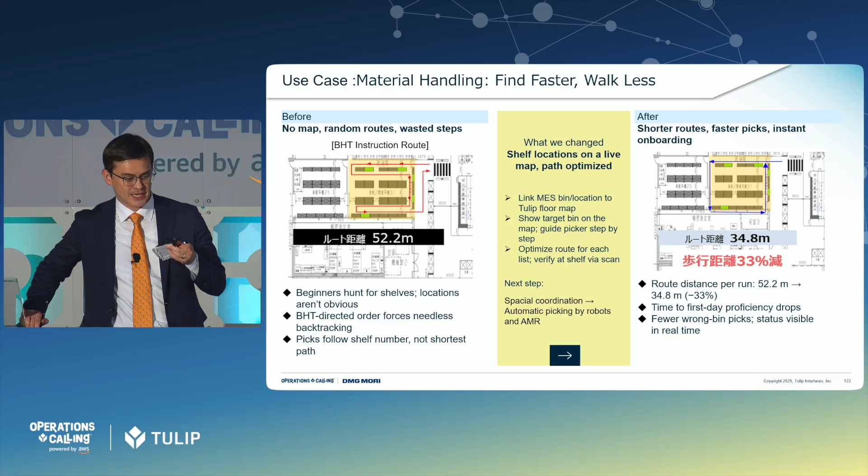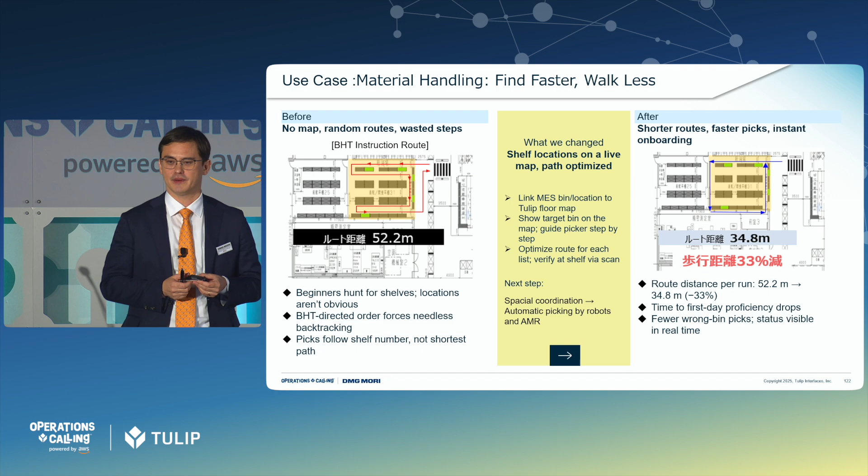This is in Japanese, but originally, for example, we had 52 meters to pick up these 5 parts, but this was reduced to 34.8 meters. Of course, a small step, but nonetheless, this kicks off the next optimization, because we believe by using this, we are now able to consider AMRs, or automated mobile robots, to pick up. But this is only possible by doing this step in between of visualizing all the picking.

So these are all the use cases. No, these are actually not all the use cases we have in IGA. We have many more, but this is only one selection, and they are continuously growing.

This is, of course, only possible because we use no-code, low-code, and our OT engineers are now actually the biggest drivers of our IT. And so we are now considering what we should do next. And actually, what we are going to do next will be also a huge change to our company.

Until now, of course, we were doing this digitization or digital transformation with Tulip on the shop floors for ourselves. So we taught our OT people how to do this, and they were doing it. But we feel like, okay, we did it for quite a while, and to just keep the secret to ourselves is really a loss of knowledge. So we are now considering bringing this to our group companies that are not only building machine tools, but, for example, all kinds of other products, and then bringing this to our suppliers.